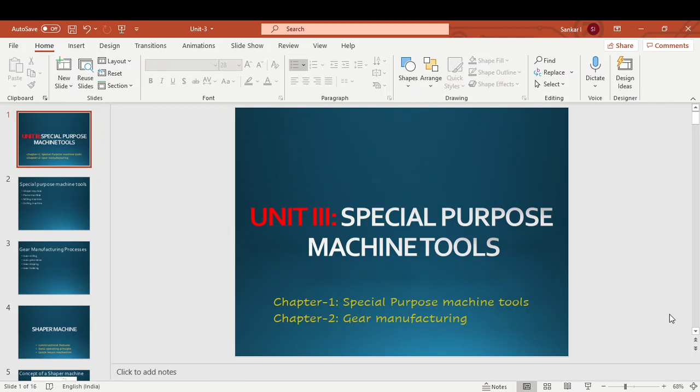Welcome, dear students. In this class, we are going to start Unit 3, Special Purpose Machine Tools. In this unit, we are going to discuss two different chapters: Chapter 1, Special Purpose Machine Tools, and Chapter 2, Gear Manufacturing.

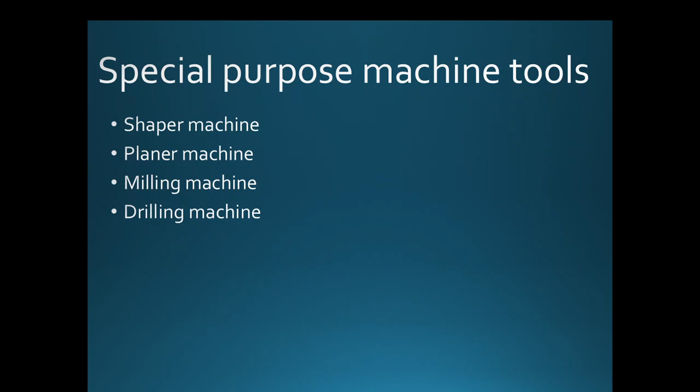In the first chapter, Special Purpose Machine Tools, we are going to discuss the constructional features, working principle, and applications of the shaper machine, planer machine, milling machine, and drilling machine.

So what are all the processes to manufacture gears? As you know, gear is a very important machine element used in all machines. Through the methods gear milling, gear generation, gear shaping, and gear hobbing, we are going to discuss how gears are manufactured in the second chapter.

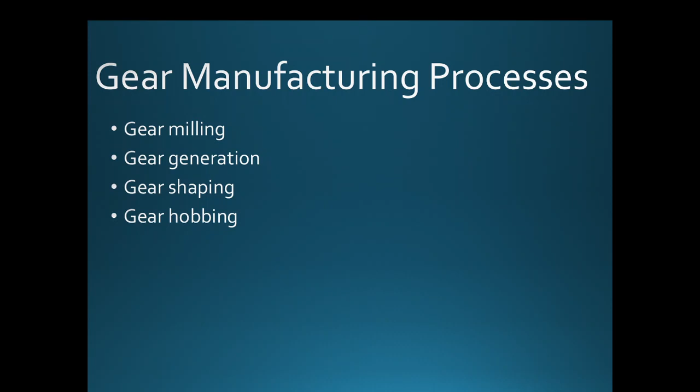Let me start the first topic in the first chapter, that is the shaper machine. In this topic we are going to study the constructional features of the shaper machine, its operating principle, and the quick return mechanism concept in the shaper.

The quick return mechanism is an important concept in a shaper machine and planer machine, which always reduces the time required for the overall machining process. By different mechanisms, the quick return is achieved in the shaper and planer machine. So what are the different types of quick return mechanisms used and how they work, these things we are going to study.

Let me start with the concept of a shaper machine. A shaper machine is a special purpose machine tool used to produce flat surfaces horizontally, vertically, or sometimes in an inclined manner. In this way we can prepare flat surfaces through a shaper machine.

Here the operation is carried out with a single point cutting tool. We are going to use a single point cutting tool, and that tool is going to reciprocate over the workpiece to remove the stock.

When the tool reciprocates over the workpiece, during the forward stroke only material is removed, and during the return stroke there is no material removal. If in a single pass it removes some material, then after it returns, the workpiece itself feeds in the direction perpendicular to the tool movement, so the next set of width is removed during the next forward stroke of the tool movement.

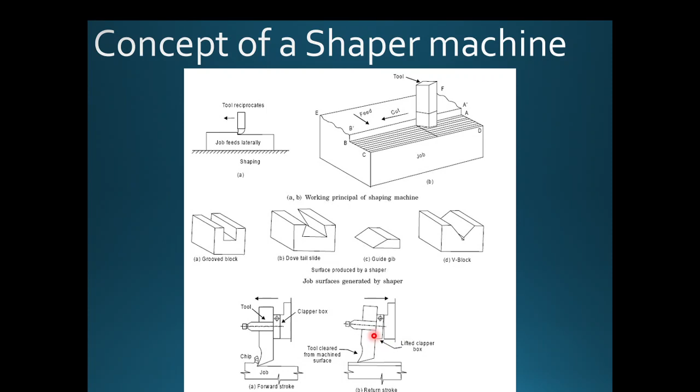When you see the video tutorial or animation of the shaper machine operation, you will come to know the exact duty of the clapper box. So this is the concept of material removal in the shaper machine.

The base is the strong casting in the shaper machine, prepared with heavy cast iron, and it is used to bear all the loads during operation as well as during the static condition of the shaper machine.

The column is again a box type hollow casting made up of cast iron, which is used to house the ram driving mechanism inside it. The quick return mechanism is housed inside the column.

In the rail, the ram is fixed to slide in front and backward direction, which is considered the cutting stroke and return stroke. So in one end of the ram we have the tool head.

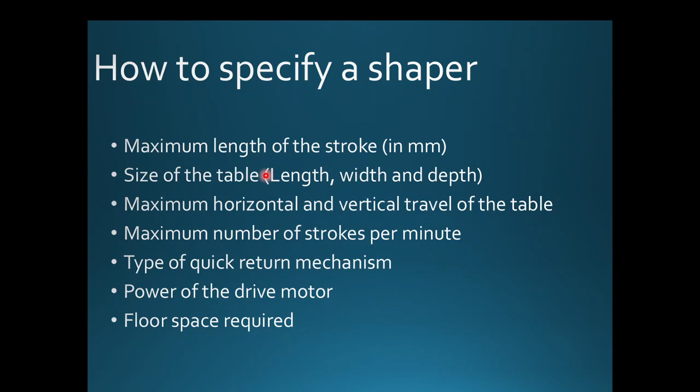So by these parameters we can specify the shaper. Keep these things in mind. Now, how are shaper machines classified? A variety of shaper machines are available in the market, and based on our requirement we can purchase any one. Four parameters are very important to classify the particular type of shaper machine.

The first classification is according to the type of mechanism used for giving reciprocating motion to the ram, that is crank type, geared type, or hydraulic type. The second is according to the type of design of the table, in which way the table is designed. Two categories of tables are generally available in the shaper: standard shaper and universal shaper.

Standard shaper table is able to move in the vertical direction and the horizontal direction, but the universal shaper table is able to rotate with respect to the horizontal axis, not into a complete full revolution, but to some extent, in order to cut inclined surfaces. This is the difference between the standard shaper and universal shaper table.

Then, according to the position of travel of the ram, that is horizontal type travel, vertical type travel, traveling head type — these are the various types of ram travel. Based on that also we can select a shaper machine based on our requirement.

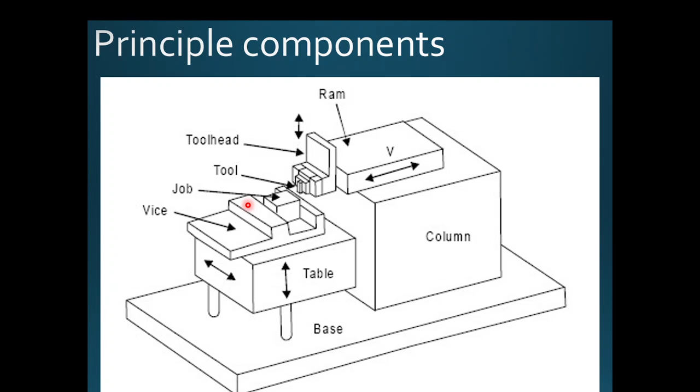In the case of a draw type machine, during the forward stroke it is considered the idle stroke, and during the return stroke the material removal happens. Simply by changing the face direction of the tool, we can adjust this, and meanwhile we need to adjust the quick return mechanism arrangement also, in order to achieve the return stroke as the cutting stroke and the forward stroke as the idle stroke. This is the draw type machine.

So these are all the various parameters used to classify the shaper machine. Now let's discuss the various parts of the shaper machine.

This is a line diagram of the shaper machine. This part is the ram of the shaper, and this is the column which houses the quick return mechanism and the driving mechanisms of the ram. This is your base, and this is your table.

Have a close look at this diagram. This is the table support, the front support. A metal column is there to support the table on the front side, and on the back side, the front side of the column is provided with a vertical slide way.

A vertical slide way. In this vertical slide way, we fitted a cross slide mechanism. In front of this cross slide mechanism a saddle is there. In that saddle only the table is attached. So this arrangement is used to give a vertical and horizontal movement of the table.

This entire table, saddle and cross slide are able to slide in vertical direction by the slide way produced in the front side of the column. This can be achieved by rotating the elevating screw. When you rotate this elevating screw, the table along with the cross slide everything will move in vertical direction, upward or downward based on the direction of rotation.

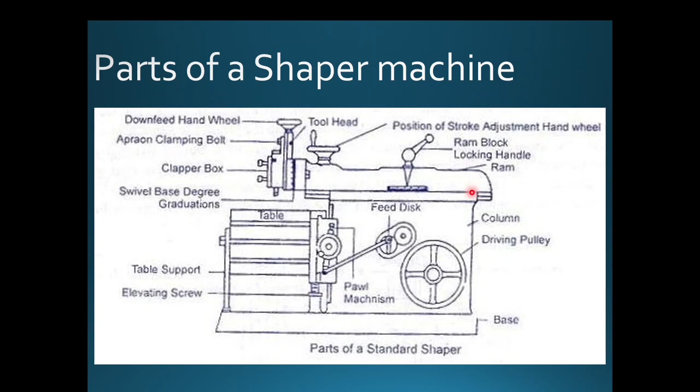So these are all the basic parts of the shaper machine. Now let's discuss how the shaper machine is working, how the material removal is happening.

This is your table and this is your vertical slide way. In the vertical slide way, we are having the cross slide. The cross slide is provided with a dovetail guideway. In this, the table is fitted, and here the front support is missed to be shown. Don't worry, just understand the concept.

Above the table, the workpiece is fixed with the help of the vise, and this is your ram. In front of the ram, we are having the tool head, and in the tool head, we fitted the cutting tool. During operation, the driving motor is switched on by means of various gearing arrangement.

The rotation is given to this bull gear. So this shaper machine shown is operating with the help of crank and slotted link type quick return mechanism. Let's understand the concept of the working principle by this itself.

When the bull gear, the bigger gear here called the bull gear, is fitted with a slider mechanism, that slider is able to slide inside the slide way provided in the crank. This is the slotted lever. The slotted lever, as the name implies, is provided with a slot way in it. Here a slider is attached.

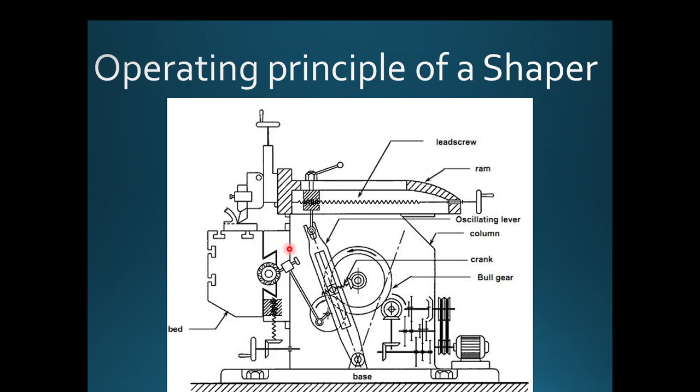Now have a close look at the tool head of the shaper. As I told, this is nothing but the clapper box. This swivel base is used to rotate the tool head with respect to the horizontal axis with certain degrees in both directions. This is the handle for downfeed, to give some depth of cut in level.

This is the feed direction of the workpiece. This is your workpiece, and that's your tool, and the tool is fixed with the tool head. This is nothing but the tool post, and that is the clapper box, which will elevate up to some angle during the return stroke to safeguard the tool tip.

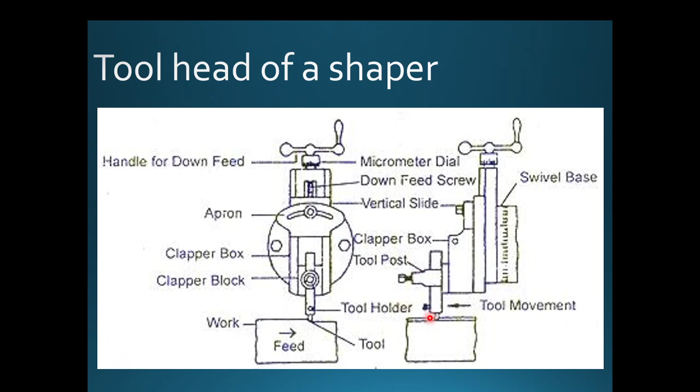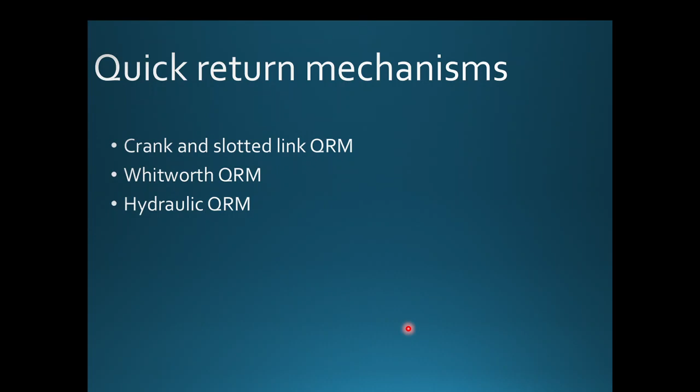What are all the various types of quick return mechanisms used in the shaper machine? Generally, three different types of quick return mechanisms are available: crank and slotted link quick return mechanism, Whitworth quick return mechanism, and hydraulic quick return mechanism. In our context, we are going to discuss the crank and slotted link quick return mechanism and the hydraulic quick return mechanism. First, let's look at the crank and slotted link quick return mechanism.

Here you see the diagram already shown to you. This is nothing but your bull gear. Inside the bull gear, we are having a slide. So in this slot, the inside of the slot in the bull gear is considered as the slide way.

Here we are having the slider. A sliding block is available, which is fitted with the slot of the bull gear, and one more slider is able to slide inside the slot of the rocker arm. This is the slotted rocker arm. Inside that, one slider is there. Another slide is fitted with the slide way of the bull gear. These two sliding blocks are connected with the crank pin, which in some articles is called the gudgeon pin.

This is your slotted lever, and it is fitted with this part. It is nothing but the pivoted part. When you start rotating this bull gear by rotating the pinion, this pinion is connected with the driving motor, and this is your bull gear.

It rotates in this direction. This is your tool tip. This forward movement is considered as the cutting stroke, and this backward movement is the return stroke. Keep this in mind.

This link arm is used to connect the rocker arm and the ram of the shaper. When the bull gear rotates, this rotation is converted into oscillations in the rocker arm, and the oscillations of the rocker arm are further transferred as the linear reciprocations in the ram of your shaper.

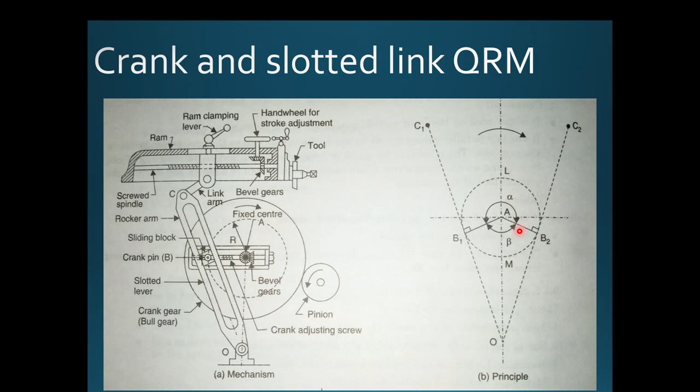This is a short video which will give you some idea about how the quick return is achieved during the forward and return stroke in the crank and slot quick return mechanism.

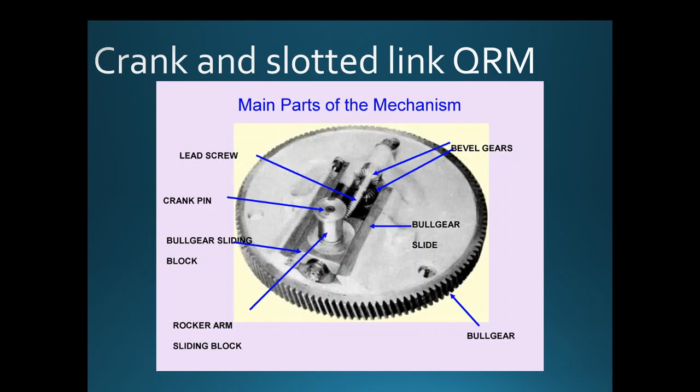One more block is connected here, which is not shown in this view. Actually, one more slider is connected here, and that slider is able to slide inside the slot of the rocker arm. And this is your lead screw.

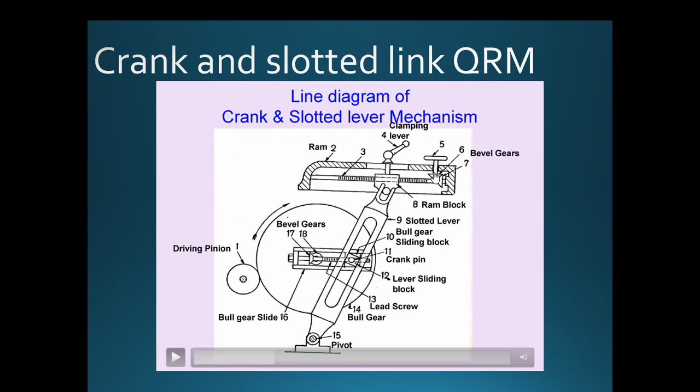This is the view, and when you rotate the bull gear, this makes the rocker arm oscillate, and the oscillation of the rocker arm is converted into the linear motion of your ram. This is actually explained in this video, not with any animation, just with pictures.

Here is the extreme backward condition of the ram, and the extreme forward condition of the ram. The angle covered by the slider during the forward stroke is higher compared to the angle covered during the return stroke, so the return stroke is achieved within very little time.

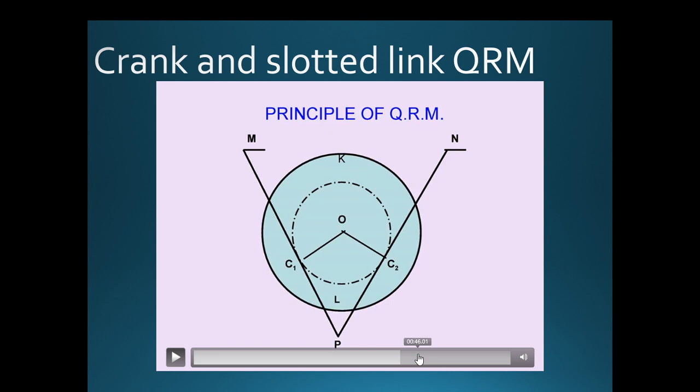This is explained in the words of this video tutorial.

And then we can go on to discuss the hydraulic quick return mechanism. Its operating principle is completely based on the hydraulic cylinder principle. Here there is no need to use a crank, a slotted link, or a bull gear.

The ram of your shaper is connected with a hydraulic cylinder's piston. This is the hydraulic cylinder. I hope you know the working principle of a hydraulic cylinder. The hydraulic cylinders are able to move front and back by introducing high pressure hydraulic liquid inside the cylinder, and due to the pressure of the hydraulic liquid, the ram will be moved backward and forward.

It is actually a double acting cylinder. Both upper opening and lower openings are available, and this side of the hydraulic cylinder is called the piston end, and this side is called the rod end. Both ends are provided with openings, and the rod of the piston is connected with the ram of your shaper.